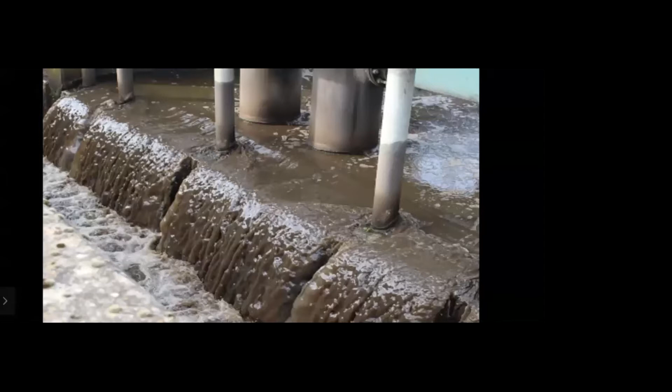This is a regular picture showing how dirty sewage water looks, and this goes directly into a river, which we'll talk about in later slides. This is a comparison between potable water and dirty water, which is not able to be drunk, which is not potable.

So the third slide, wastewater: from waste to resource. This shows that actually no one is being careful or aware about the gigantic problem of wastewater. Worldwide, the majority of wastewater is neither collected nor treated. Wastewater is a valuable resource, but it is often seen as a burden. Whenever water is wasted, people think of it as a liability.

They don't care about it, just something to dispose of. This perception needs to be changed. This way of thinking needs to be changed.

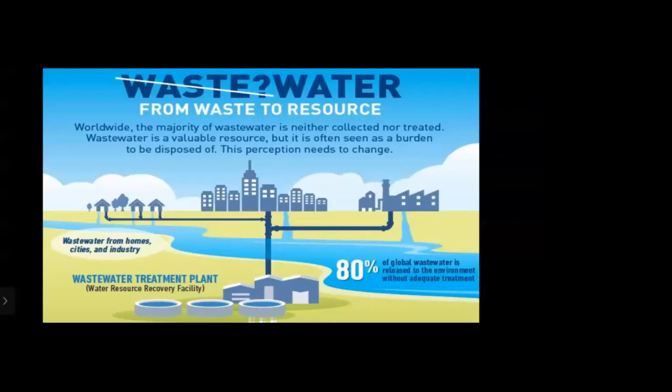As we can see, 80% of global wastewater is released to the environment without adequate treatment, and this is a fact. 80% of global water that is wasted through industries or sewage is directly released into rivers without being properly treated. So what is actually wastewater and how exactly does it occur?

Danish, please. Hmm.

What is wastewater? Wastewater is the term used to describe a distraught condition of the water or water body that is unfit for domestic use and is unable to sufficiently sustain aquatic life because it gets polluted due to the presence of some foreign materials.

There are a lot of reasons for water getting polluted, but the major contributors are: sewage water collected in towns and urban areas, and secondly, industrial sources including liquid chemical waste that flows into rivers without being properly treated.

And how it is reduced: the fact that very few people are actually aware about the gigantic problem of water being wasted plays a big role in the amount of waste produced. Okay, hold it for a minute.

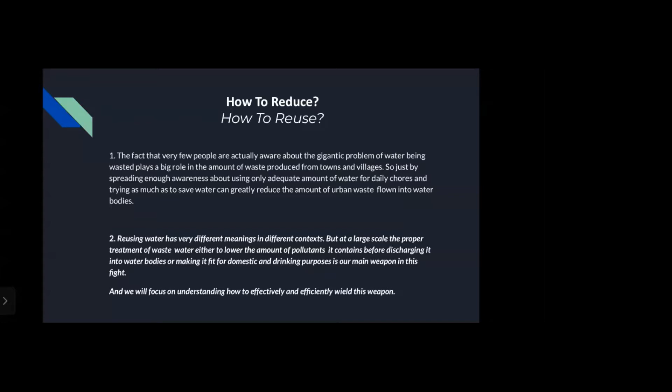So the previous slide, the next slide, how to reuse. Danish, continue please.

Danish. Hello. Continue. Hello.

Continue. Wastewater contaminants, point number one: suspended solids. Main source: industrial and storm sewage have higher concentrations of suspended solids.

The second point is biodegradable organics, and the main source is effluent from pulp and paper mills, animal manure. The third point is pathogenic bacteria, and the main source of this is animal and human waste. The fourth point: nutrients, nitrogen and phosphorus, main sources are fossil fuels and agriculture. So these are the basic water contaminants.

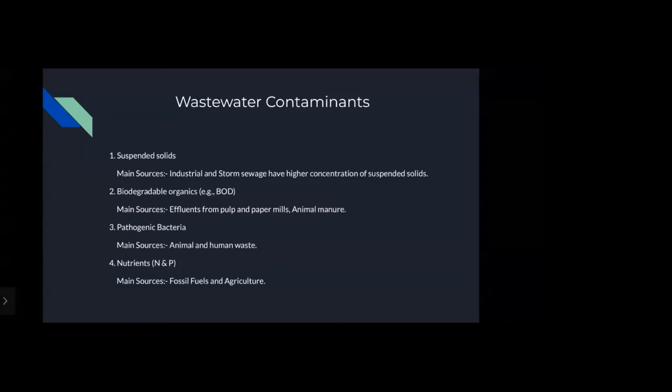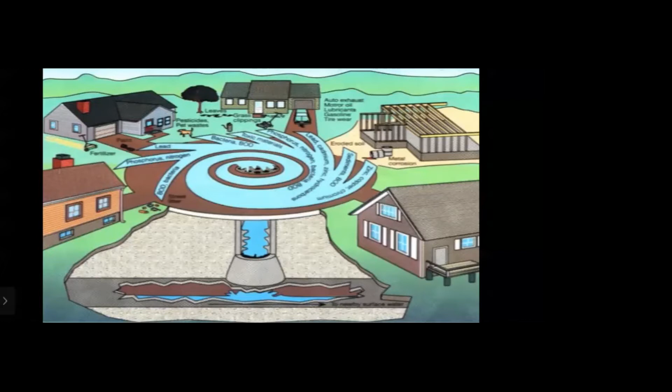Actually, wastewater contaminants are a very wide spectrum, but we are covering only four of them. The next slide shows how water actually gets polluted, how the process works from homes, from industries, all of it, and all of this wastewater seeps down into the groundwater without being treated.

Wastewater treatment. Now we are going to cover the topic of wastewater treatment, which is actually utilized by a majority of countries to treat water, though they are very few in number.

So when effluent is discharged into river bodies such as lakes, rivers, or seas, a number of processes occur like physical, chemical, and biological characteristic water changes which cause loss of organisms. So this is the ecological definition of wastewater.

The extent of damage, this point needs to be clear, depends upon the type of pollution present in the effluent. So the different contaminants that we saw in the previous slide corrode the wastewater at different levels.

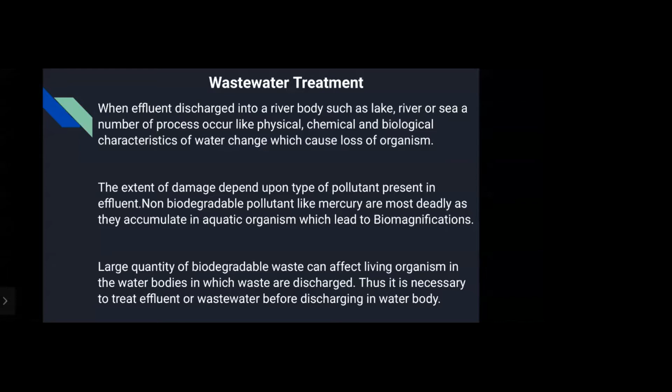And this is also due to wastewater. A large quantity of biodegradable waste can affect living organisms in the water bodies into which it is discharged. Thus, it is necessary to treat effluent or wastewater before discharging into the body. So this is very important, to treat it before discharging.

Now, levels of treatment. As we have seen in the previous slide, we treat the water through the wastewater treatment plant, but there are different levels of treatment in this plant. Primary: the primary level removes physical separation of dirt and large objects, like bottles and coarse amounts of dirt present in the wastewater. The second process that comes inside primary process is sedimentation and screening of large debris.

Aerobic microbiological process: sludge. This is very important, as organic matter like dead leaves or compost can break into NH3 and NO3, nitrate and ammonia, which are very important for aquatic nutrients. This is also part of the secondary process.

Effluent treatment: this is a flow chart showing how wastewater flows and how it is finalized. The wastewater comes in at the starting point of the treatment, then goes through the primary process, which has two phases: physical and chemical. We'll see about that in the next slides.

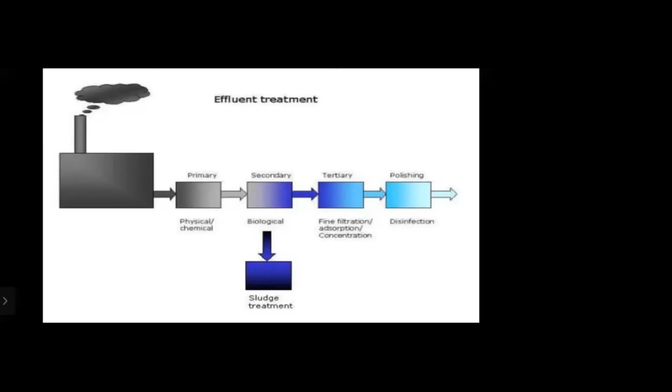Secondary process is the biological changes I just explained. Then the tertiary process comes: fine filtration, adsorption, and concentration. After that, polishing is done, disinfection of viruses and such, and then the sludge is treated and disposed of into the water bodies.

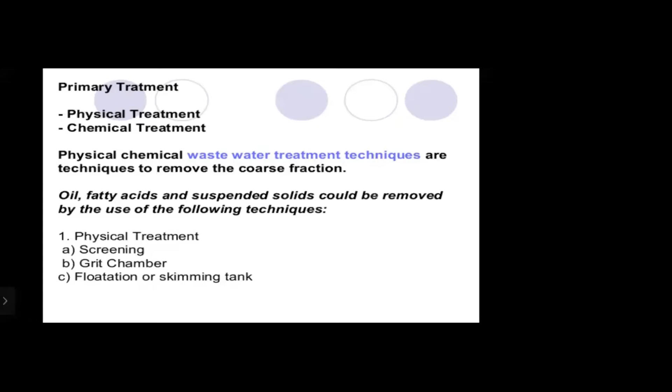These physical and chemical treatments have different techniques. Physical treatment contains the first technique, called screening. The second process is called grit chamber, and the third component is called floatation or skimming tank. We'll see about it in the next slides.

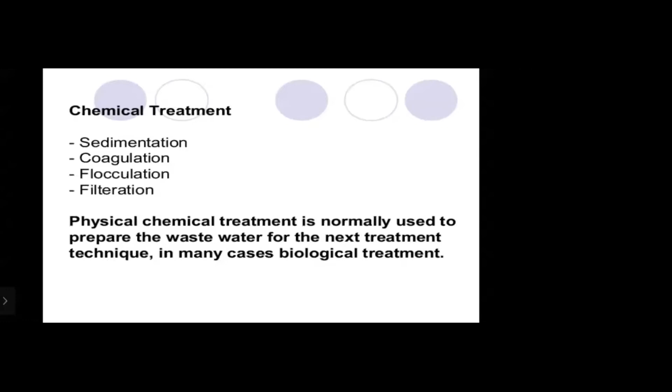The second part of primary treatment is chemical treatment, which contains sedimentation, coagulation, flocculation, and filtration. A very important point: primary treatment, whether chemical or physical, is normally used to prepare the wastewater for the next treatment. So basically it is the starting point of the treatment technique, and in many cases leads to biological treatment, as we've seen in the previous slides.

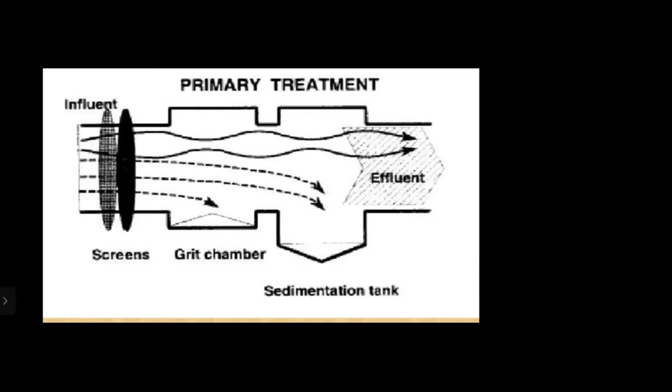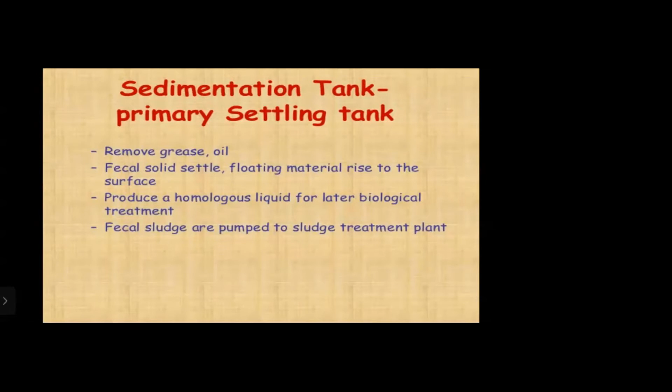Some primary treatment: the sedimentation tank, or primary settling tank, removes grease, oil, and fecal solids settle; floating material rises to the surface, producing a homogeneous liquid for later biological treatment. Fecal sludge is pumped to the sludge treatment plant. In the primary settling tank, there's wastewater inlet, the settled wastewater outlet, and the sludge discharged to treatment.

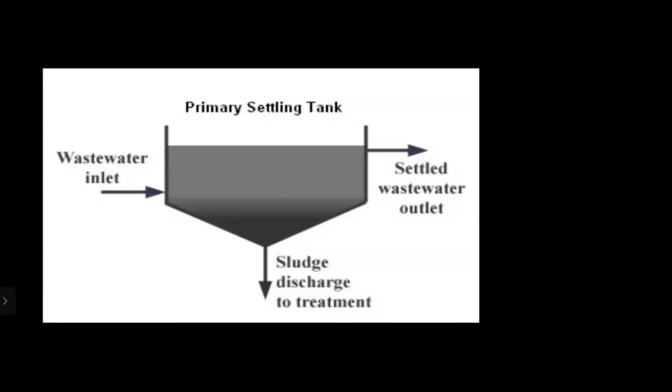The secondary treatment is biological treatment, activated sludge. There are some processes: activated sludge, trickling filter, and oxidation ponds.

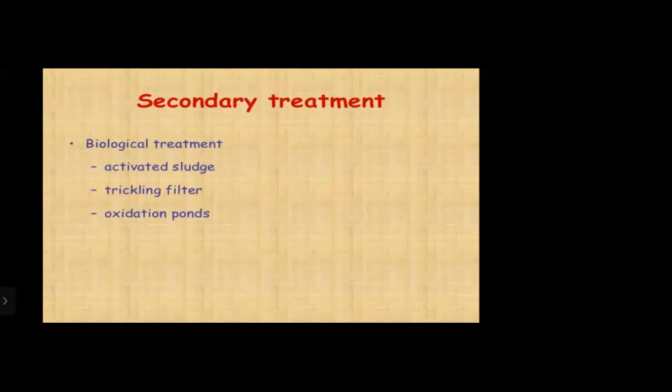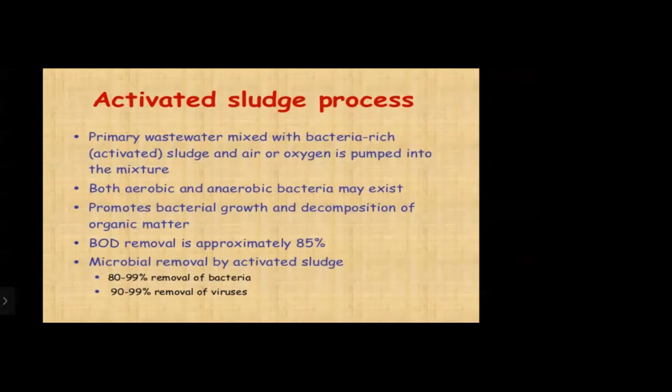The activated sludge process: primary wastewater mixed with bacteria-rich activated sludge, with air or oxygen pumped into the mixture. Both aerobic and anaerobic bacteria may exist. This promotes bacterial growth and decomposition of organic matter. BOD removal is approximately 85 percent.

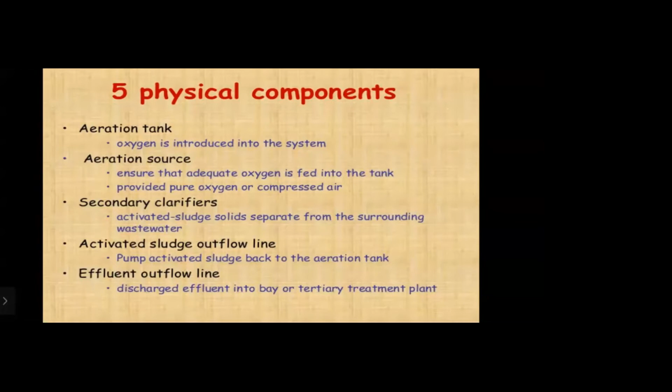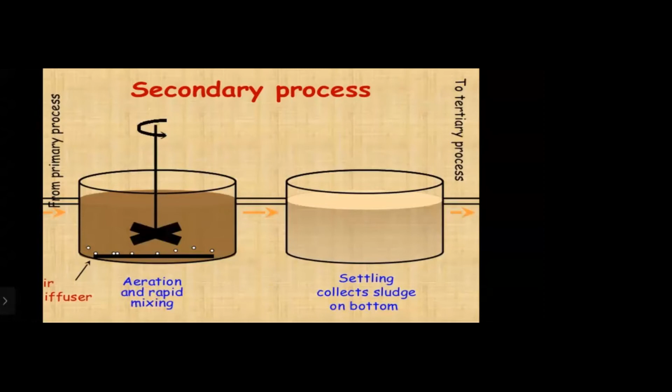Settling collects sludge from the bottom, where there is a tank. As I said, it leads to the outlet. This is also a chart showing how it occurs.

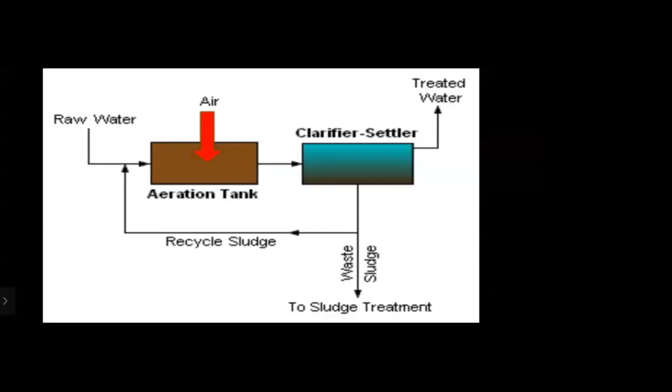Now after biological treatment, the third point is trickling filters. Trickling filters are beds made of coke, carbonized coal, limestone chips, or specially fabricated plastic media, optimized in thickness by insect or worm grazing.

The primary wastewater is sprayed over the filter, and microbes decompose organic material aerobically. This has low pathogen removal: bacteria 20 to 90%, virus 50 to 90%, and Giardia cysts 70 to 90%.

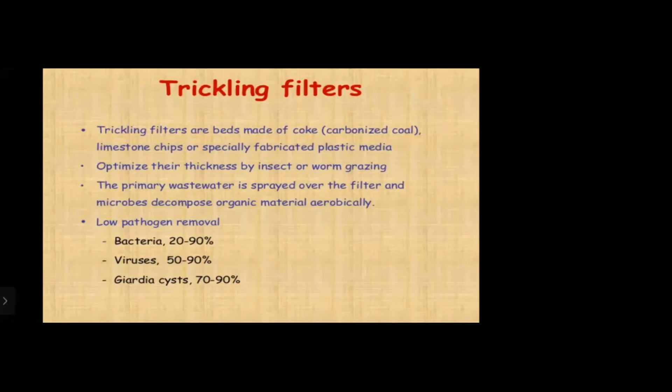The basic working of the trickling filter is the same as the aeration tank. For example, it still utilizes bacteria and uses the same method, but does things differently. Let's see these filter beds.

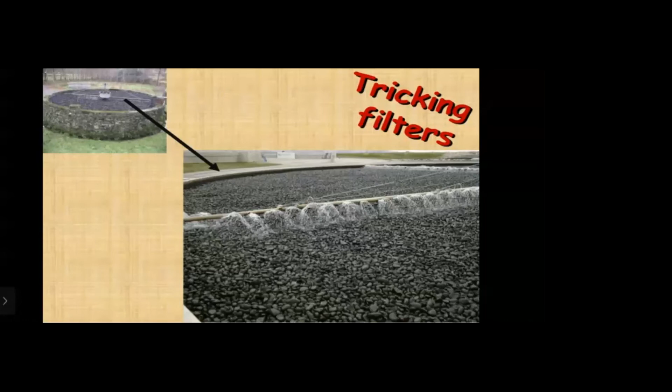The small stones contain cultivated microbes, and wastewater is thrown onto them. The microbes break down the organic material, and then wastewater seeps down. Below them there is a tank so that the treated water is collected, and the process is repeated again and again so that the required water is collected and then sent to the tertiary treatment plants.

Now the fourth part of biological treatment is stabilization or oxidation ponds. This also utilizes the same method but differently. The earlier two methods require a lot of maintenance and are not cost efficient, and at the same time do very little in removing bacteria, virus, and protozoa.

Oxidation ponds are a few meters deep, maybe 5, 6, or up to 10 meters depending on how cost effective they are, and up to a hectare in size, but they are very large. They are low cost, with a retention time of 1 to 4 weeks.

Now what is retention time? This tells the amount of time taken to actually purify the water. This is a drawback of oxidation ponds, as the earlier two methods are repeated again and again, but due to the nature of this method we cannot repeat the process, and it takes 1 to 4 weeks for water to be treated. Odor and mosquitoes can be a problem.

The second drawback of this method is that odor, foul smell, and mosquitoes can be a problem because the water is collected for a large period of time, 1 to 4 weeks.

Now for pathogen removal, which is a plus point of this method: bacteria are removed in high numbers, like 90 to 99%, almost all of them. Viruses are removed 90 to 99%, and protozoa 67 to 99%. Mechanisms include the long detention time, high pH value of 10 to 10.5 generated by photosynthesis, predators, and sunlight temperature.

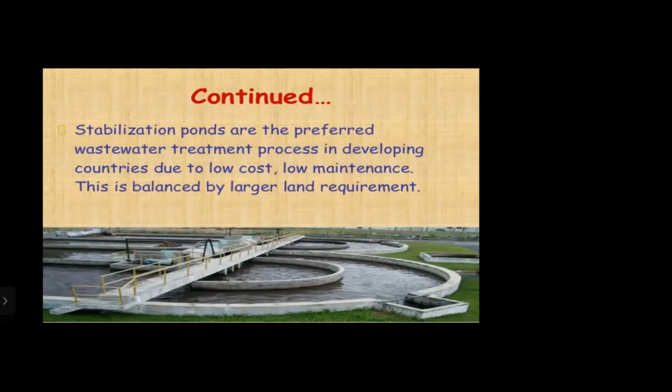When the treatment is done, the effluent back to stream after a final carbon filtration and chlorination dechlorination.

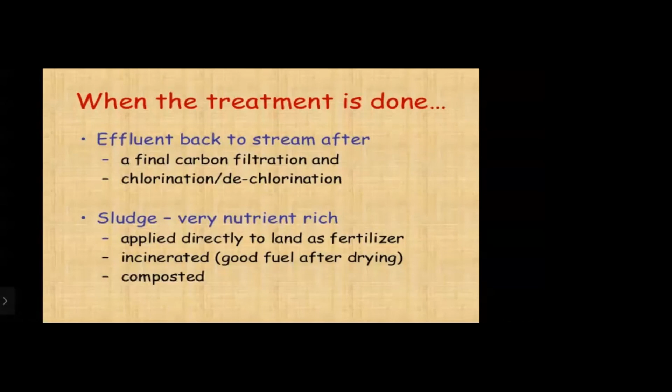The sludge, being very nutrient rich, is applied directly to land as fertilizer, incinerated as good fuel after drying, or composted. After the sludge is treated, it is thickened and water is removed, so the thick sludge can be differentiated from the treated water.

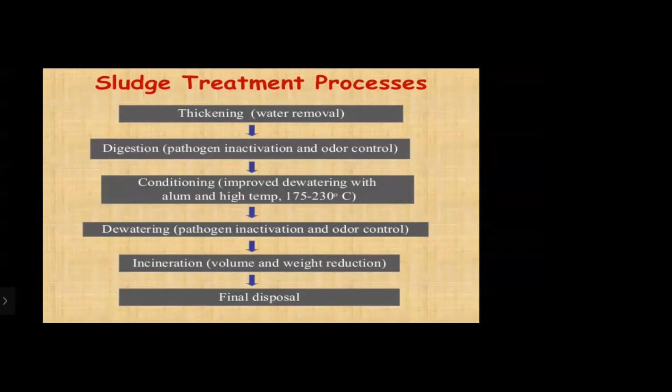Digestion leads to pathogen inactivation and odor control. Conditioning improves dewatering with alum and high temperatures of 175 to almost 230 degrees Celsius. Dewatering leads to pathogen inactivation and odor control, incineration gives volume and weight reduction, and then the water is finally disposed.

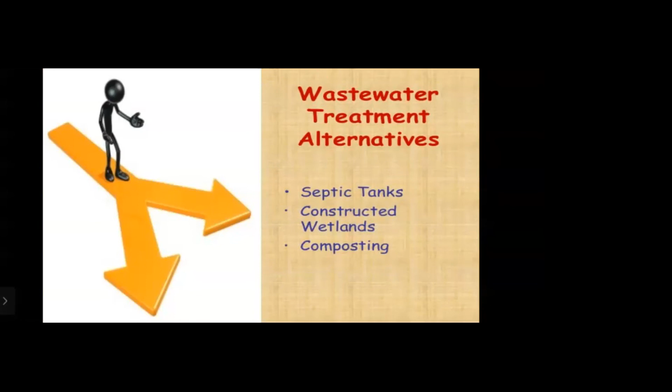Wastewater treatment alternatives include septic tanks, which are huge tanks constructed around homes and home areas so that waste can be converted into compost. Constructed wetlands are naturally occurring oxidation pond type systems.

Most importantly, we should be aware about this. We should focus on setting up more water treatment plants, and also, most importantly, choosing efficient methods for water treatment plants is essential. Thank you.